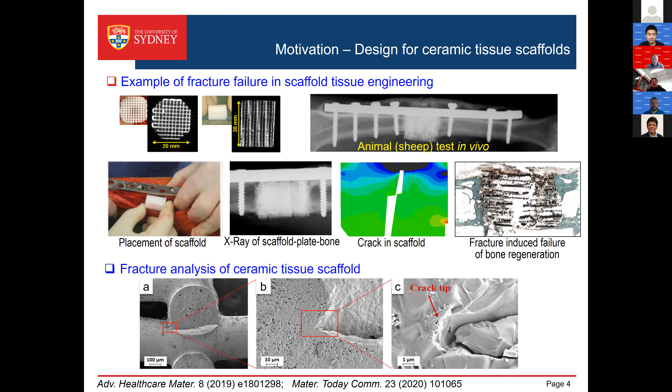So this actually gave us motivation. What's the best topological configuration so that we can ensure the system is safe? For this reason, we looked at the design problems. Showing here is a schematic. We have such a domain, and we try to place the reinforcement or inclusion materials in this domain so that we can maximize the fracture resistance.

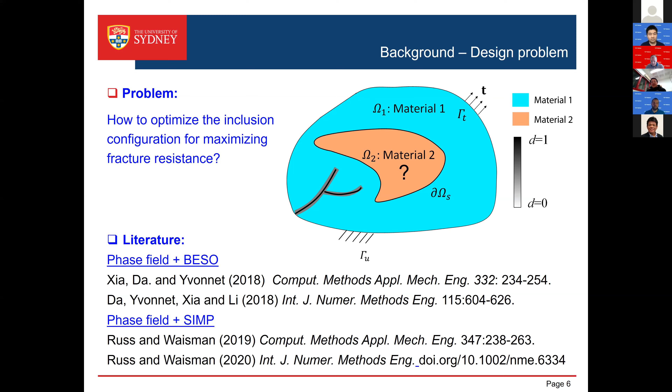I would like to acknowledge some existing work done by two groups. One is led by Xia and another is in Columbia. They used the phase field combined with BESO or phase field combined with SIMP model. In this particular study, we want to combine the phase field with level sets. So let's look at the phase field model.

Showing here is a different modeling mechanism to capture the fracture or crack propagation. As you can see, we can model the crack simply using this discontinuity, a boundary interface. Alternatively, we can still capture this change of the media, but this time using a smeared damaged crack. In other words, we can use a phase field variable to model this fracture inside of this media. To do so, we can define the phase field variable D.

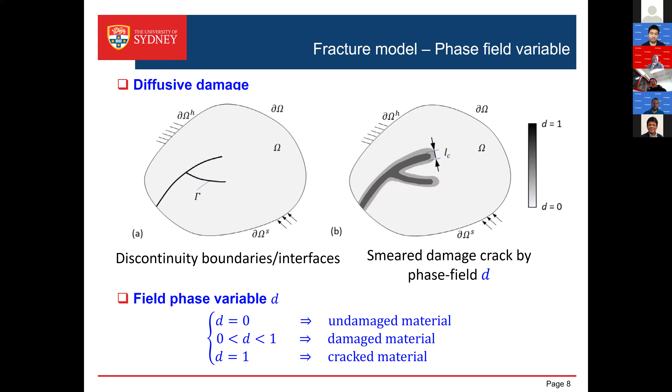If D is equal to 0, that means there's no damage. If D is equal to 1, it's completely damaged. In between, there's some damage, but it may not be completely fractured yet. So we can use the phase field model to model the whole system. The potential energy this time needs to take into account the fracture energy and the strain energy. These two components form the potential energy.

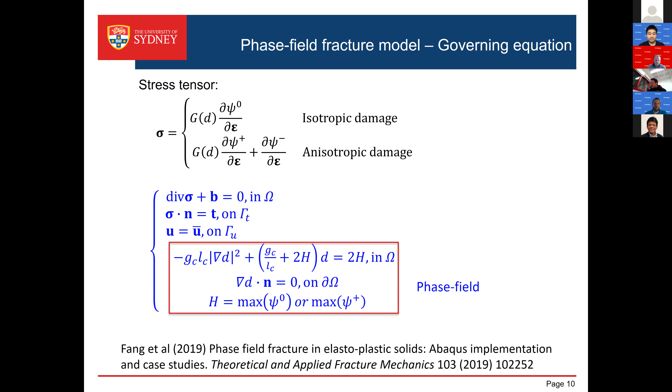Specifically, we can model isotropic damage and anisotropic damage by using the phase field variable. Showing here are the modeling details. We can formulate the stress tensor and then bring this to the equilibrium equation. So this is a new system using the phase field model. If you are interested in how to implement phase field, you can read this article. We implemented this in Abaqus and provided the code, so you can download the code and do some case studies to model the fracture using the phase field model.

Now, after we have this phase field method, we can further look at how to implement this phase field fracture model in topology optimization. Shown here is our problem. We're going to look at this domain, and there is a phase field based fracture. This is just a continuous model.

And our question is how to optimize the inclusion reinforcement materials so that we can maximize the fracture resistance. To do so, we use the level set formulation, and this is quite standard. We just follow the standard approach and use the level set function to model these materials and their evolution.

The objective function we set up for this optimization problem is to maximize the fracture resistance. For this reason, we can use the mechanical work as the objective function. The mechanical work can be approximately expressed in terms of the entire fracture or crack propagation process. During the whole fracture propagation process, what's the mechanical work? We can add all these together to approximately obtain this mechanical work.

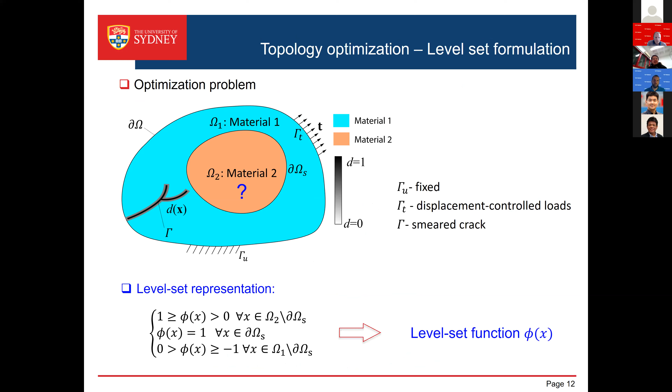Let me go back to this. Shown here, we use displacement-controlled loading. For this reason, we can look at the displacement loads. We apply displacement at a constant rate. Shown here is the formulation. After that, we can further write the mechanical work in terms of step-by-step incremental mechanical work.

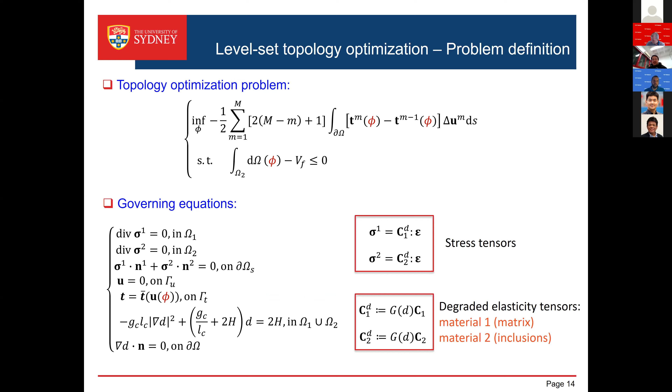Now, we can define the topology optimization problem by using the mechanical work. Our purpose is to maximize this, or minimize the negative. And we can set up the volume constraints. Shown here is the governing equation based upon the phase field. And we use two different materials. Material one serves as the matrix. Material two serves as the inclusion.

The challenge is how to derive the topological derivative. What we do is look at the influence of creating an infinitely small hole in this domain on the shape functional. This is a typical formulation for sensitivity analysis. But the challenge is that, first, this is a nonlinear problem. We need to take into account the progressive crack propagation.

For this reason, we need to linearize this nonlinear problem by using very small or short time steps. Then we can derive the sub-derivatives in a stepwise fashion, and the total derivative is just the sum of all these sub-derivatives. We make use of the staggered algorithm for each time step. In this particular case, we ignored the effect of topological change on the phase field because of the small time step.

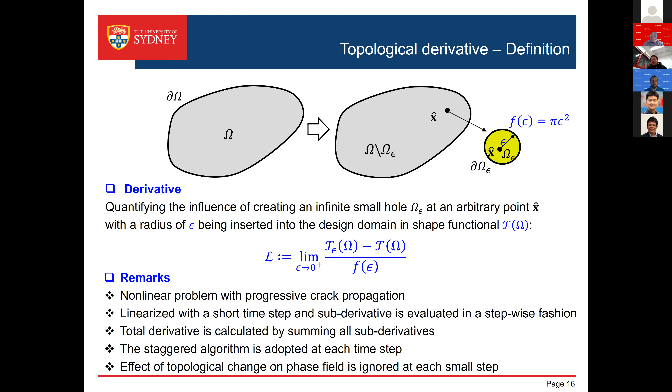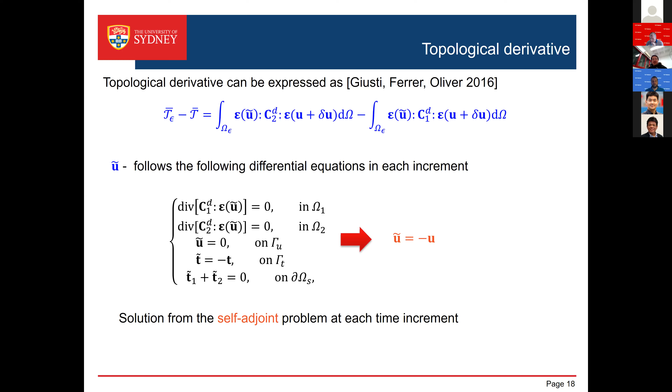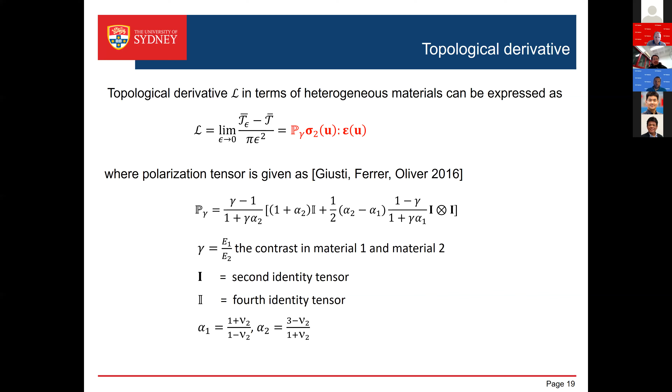And that gives us a really important clue. This actually comes with the same shape as the previous governing equation. For this reason, when we solve the previous governing equation, we can obtain the self-adjoint variable. So this is step-by-step time dependence. And we can further write the topological derivative in terms of the heterogeneous materials. Shown here is some more specific mathematics.

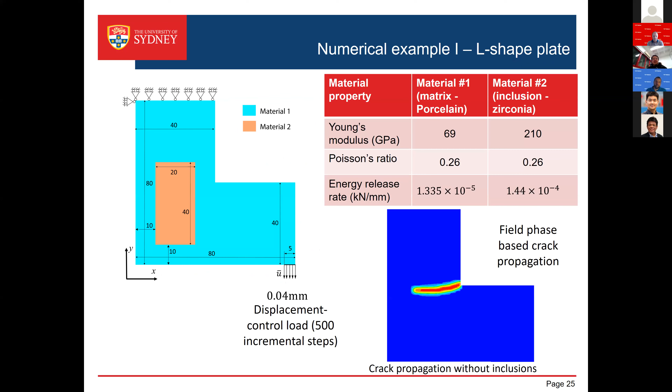The first example we would like to look at is an L shape. Without the reinforcement inclusion, we can see the crack propagates horizontally, as shown over here. After we place the inclusion or reinforcement, we can see the fracture changes direction.

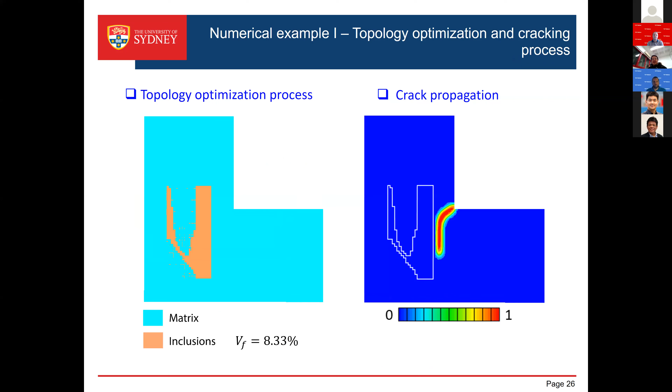So showing here is our topological design process. This is the corresponding fracture process. And some people may argue if you want to block crack propagation horizontally, you can easily set up two vertical bars, and they can prevent this propagation horizontally, or just simply place a square inclusion, or you can simply use the stiffness-based linear topology optimization.

In comparison, if you look at the mechanical work, we can see clearly the proposed method, the phase field-based topology optimization, provides the highest mechanical work to actually fracture the structure. So this is a comparison. If you plot the mechanical force versus the displacement, we can see the proposed method actually generated the largest. Below this is the energy, so it generated the highest mechanical work.

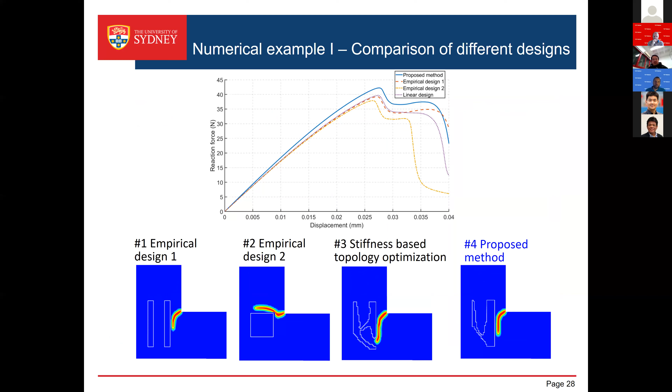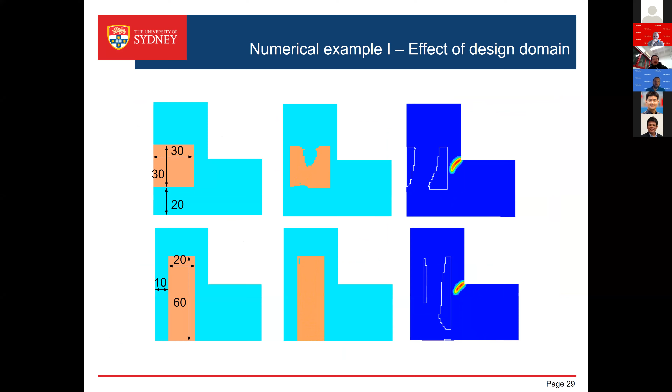So some people may argue if I place the design domain in different places, the results can be different, as you can see from here, but it comes with the same volume. So basically this is our design domain inside of this L shape. The second example I would like to show is, if we have this slab with two preset cracks, how to optimize the inclusion topology.

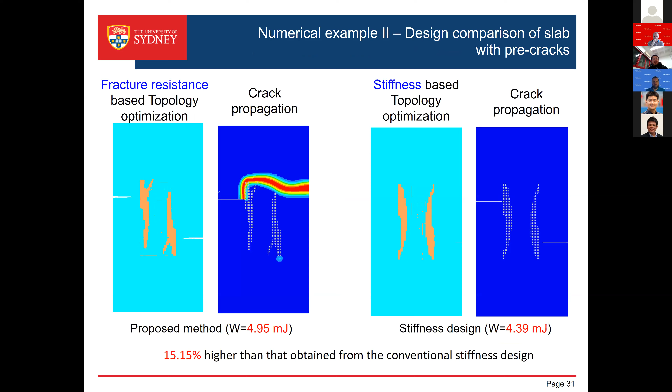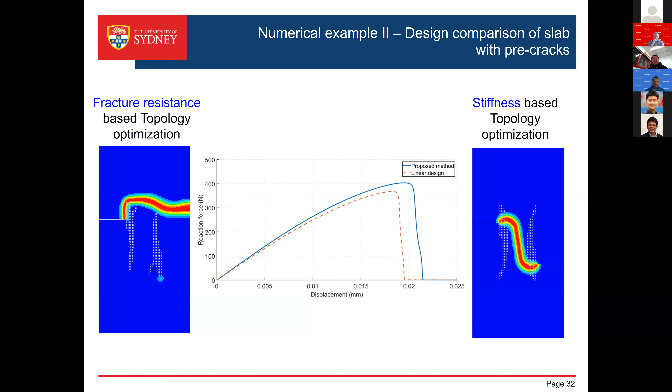So the left-hand side is fracture resistance-based topology optimization, and the right-hand side is a stiffness-based design. This is more traditional, and showing here is our fracture process inside of the optimized inclusion. And this is a comparison. If you plot the force versus displacement, obviously this one comes with much higher energy to fracture the structure.

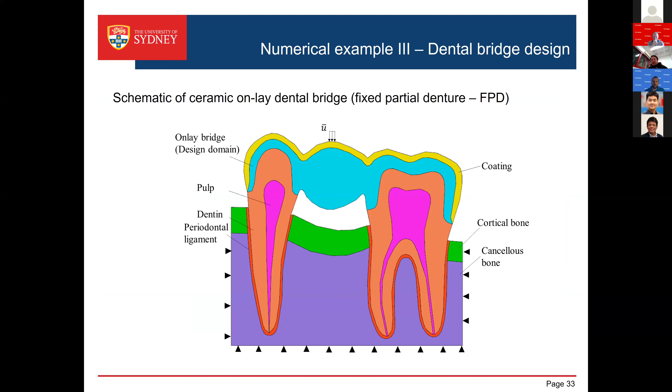All right, to conclude, first of all, we present the phase field-based level set topology optimization for enhancing the fracture resistance. And in this particular study, we use the path-dependent topological derivative. So this is quite important. And finally, the proposed examples actually show the advantage of this type of study. If you want to know more detail about this study, you can refer to this particular paper we recently published.

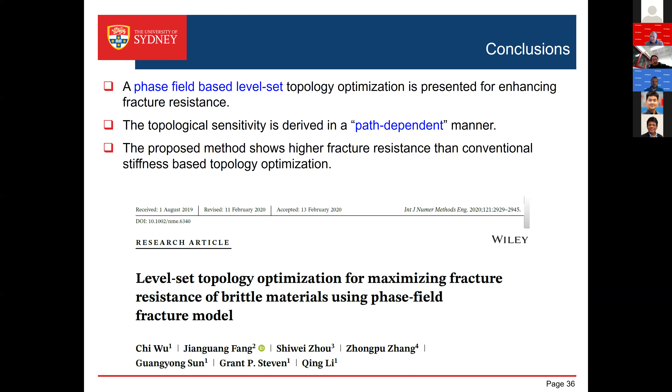So I have a question. Yes, please. Okay. Can you hear me, Professor Li? Yes, I can hear. Okay. I think this is a very wonderful work, and the presentation is also very clear and insightful.

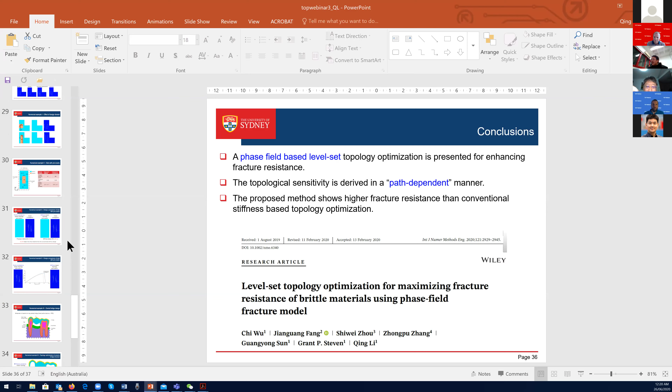So my question is that, to my knowledge, the measure of the fracture resistance is closely related to the boundary condition, right? Yeah. So my question is, in your research work, what kind of boundary condition? I mean, do you prescribe the external load, or prescribe the displacement on the boundary, or are both types of boundary condition considered?

In this particular study, we use displacement-controlled loading. We can of course use force loading directly. The displacement loading is relatively more stable for this kind of modeling. So for this reason, currently we just use the displacement control. We can of course try later on directly applying the force on the boundary and see what's the difference, in particular for the topology optimization results.

Okay. So I mean, if you change the type of the prescribed boundary condition, maybe the sign of the objective function should be changed. For example, from minimization to maximization, something like that. Yeah, that can be, you're right. So, I agree. So thank you very much.

Thank you. So Qing, I have also a question. Can you hear me? I can hear. Yeah. So I heard that you are using the displacement loading conditions, right? So in that case, the adjoint equation should not be the same as the equilibrium equation when deriving the sensitivity. So in one of your slides, it is written that the adjoint variable is equal to the negative real displacement.

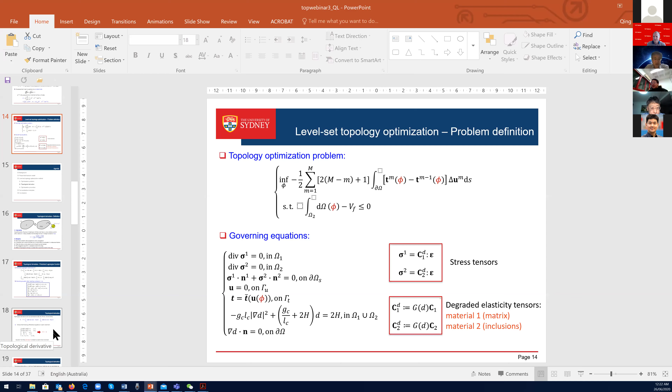You said you are using a displacement loading. Yeah. So here, if you look, the traction loading, right? If you look at this comparison with that one, they have come with a similar sort of formulation. So that means that we can actually use the sort of self-adjoint solutions to obtain that. For this formulation, the adjoint equation is the same as the state equation. That's right. Thank you.

Thank you. I think Wei Chen has a question. Yes, Qing, this is a very nice work. Can you hear me? I think it's very practically useful.

I have a question about modeling the fracture behavior, because fracture behavior is very much like a microstructure-induced behavior. So there's a lot of stochasticity in the process, and it is very much location dependent. I don't think this is something that needs to be done for this particular work right now, but I'm asking for the long run: how would you introduce stochasticity, and how do you introduce microstructure-induced behavior in this kind of process?

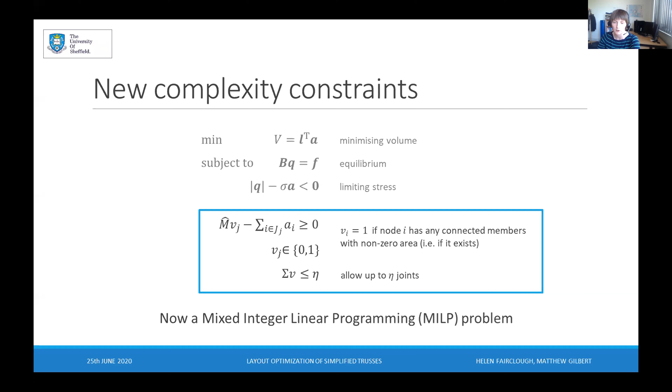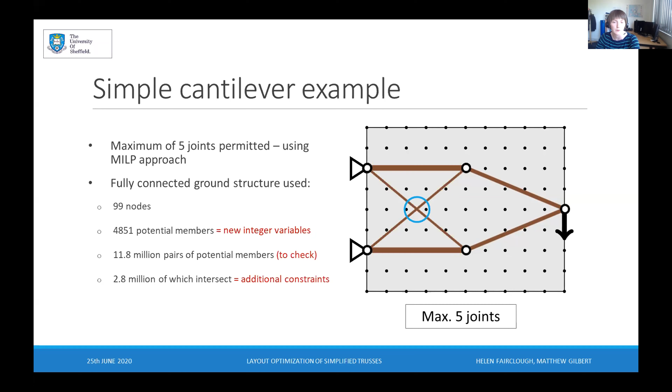And from this, we would find that almost 3 million of them would have to be an additional constraint to stop them from intersecting. So here we have those new constraints added to the formulation. And you can see this is now a very large integer programming problem, really far beyond what's tractable. However, we can still solve this if we use what is known as lazy constraints. And we use this to implement these bottom constraints here.

So with a lazy constraint, we don't include it in the original formulation as we send it to the optimizer. Instead, every time a potential solution is found, we check to see whether any of them would be violated, and if so, we add only those constraints to the problem. So this is now much smaller, and we can try and solve it.

So for this example again, if we find this solution as the potential bound, we do the check, we find that these 2 bars are intersecting. So we know that we need to add a new constraint referencing those 2 bars, saying they can't both be present in any given structure. We reject it as a potential bound, and we continue using our branch and bound algorithm. We continue this until we find this final solution for this case.

And to find this, we actually only needed to add 3 constraints to prevent 3 crossovers compared to the several million that we'd have had to add if we wanted to add them all at the beginning. So in this, we've reduced the computational time from a problem that wouldn't converge even given days of computing time to something that solves in about a minute. And again, we can refine it somewhat by using geometry optimization.

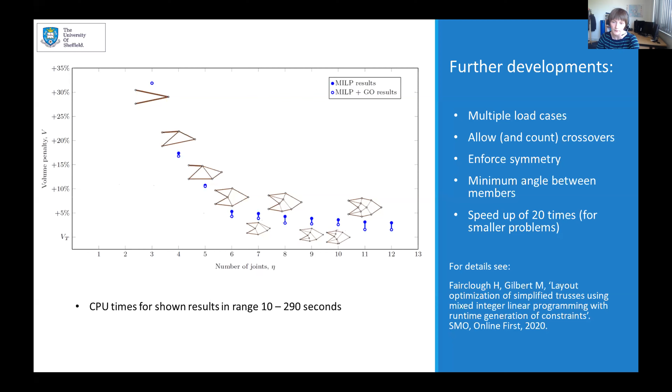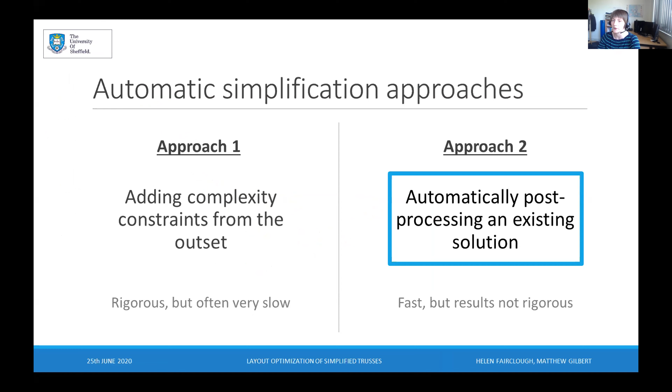However, even though we have these significant speed ups, we're still looking at about a minute to solve these problems, which isn't quite quick enough if we want to make an interactive tool for designers. So I'm now going to outline our second approach, which is a faster but less rigorous approach, and it's based on a post-processing type approach.

So for this one, we'd solve the layout and geometry optimization problems in the standard way. And our next step would be a modified version of the geometry optimization, where the objective function is now to minimize the number of members, and an extra constraint is that we have a limit on the increase in volume. And instead of using integer variables, we're going to approximate those variables using a smooth Heaviside function, so we can use a general continuous optimizer there.

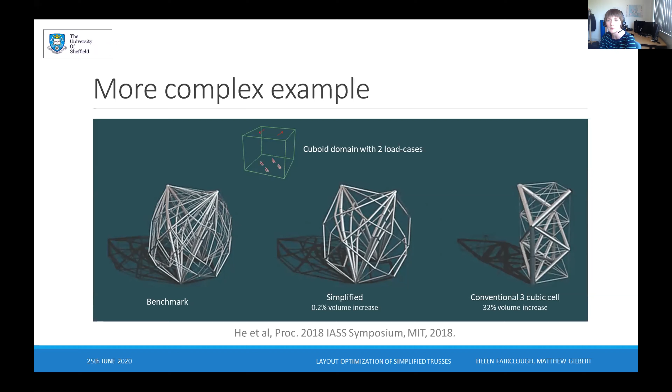So this approach is the one that we've been using in most of our software that we have available. So we have a plugin for the Rhino and Grasshopper parametric modeling software that is quite commonly used in the building industry. And this lets you create quite complex 3D geometries, and you can interact with them parametrically.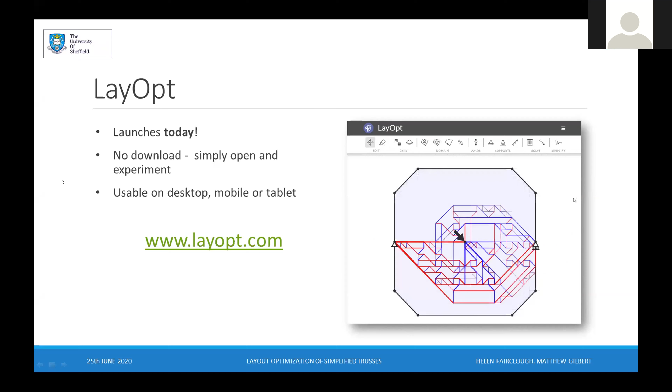Sorry, can you hear me fine? Yes. Go ahead. Sorry, it's Dirk speaking. Can you just go back to the slide where you illustrate the original problem you had? You had a slide with a very messy truss structure. That one? No, earlier on. Here. Here, yeah. Okay. I wonder whether there might not be slightly more elegant ways to solve the issue you're trying to solve, rather than adding all sorts of... Sorry, somebody is making a lot of noise, mute microphones if you are not speaking. Could you repeat the question? No, it's not really a question. I just wanted to see the picture again.

I just wonder, maybe to put it to the floor, whether this is the sort of result we expect from a truss optimization. How much is that result just maybe a failure of the optimization algorithm, or in how the problem has been set up? So the top right image there is very much a Michell-type truss-like continuum, or a close approximation thereof. So we know that there are significant numbers of problems where that is the theoretical solution. Indeed, there are clearly many options for how we simplify things. Okay, okay.

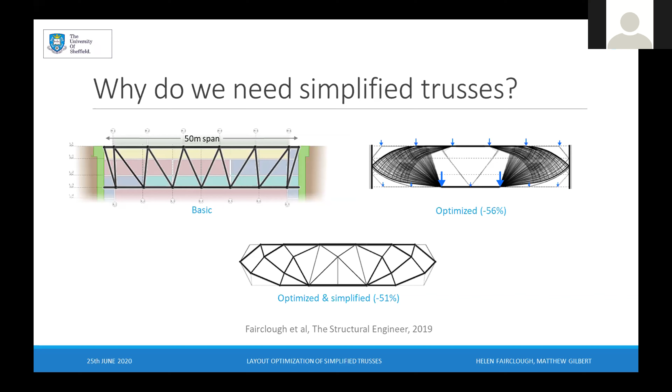And then a quick question on connecting members, which is, I think, on the next, you had a couple of nice basic simple pictures. Here, also this, whether the members cross or not, you know, if it's really an optimal solution and the members cross, but they should not be connected, then that's sort of what it should be, or no. You know what I mean?

Yeah, so we have in the paper also extended this so that you have a limited number of members, but that number of members includes sort of one extra for every time you have a cross. And yeah, we found that particularly useful in multiple load case problems where we use a plastic approach. So you get these sort of overlaid examples where you have almost two structures, one on top of the other. So we found that it was really helpful to be able to take that approach then.

Yeah, and to be specific, my feeling is just that this issue of complexity and the number of connections you have at a node can also be cast as linear constraints in some way. I just have a feeling, but I might be wrong. I think it might be possible, but yeah, maybe something to think about, or maybe someone gets inspired at some point. Yep, I'd certainly be interested to see it if anyone can find a way to do it.

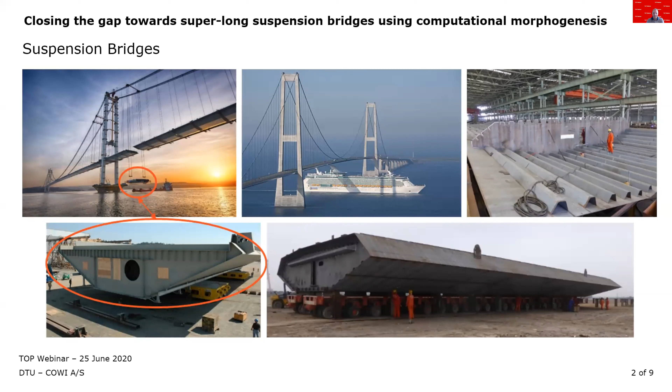And these are some of the largest man-made structures, and they facilitate very important infrastructure links and have often become landmarks. The part of the bridge that we have focused on is the bridge deck or the bridge girder, which is the part of the bridge that carries the traffic, and as you see, is suspended here from the hangers. The design principles of the bridge deck have remained more or less unchanged for the past 60 years. So we thought it was about time to see if we could reinvent this design concept and make a more material efficient design concept.

So further motivation for doing the work is that in suspension bridges, girder self-weight is critical, particularly in super long suspension bridges. And this is clear from this small figure, where you see a typical layout of a suspension bridge. We have the bridge girder carrying the traffic. So the self-weight of the girder and the traffic load has to be carried by hangers and main cables, which transfer the loads out to the anchor blocks, towers, and tower foundations. So this means that if we can reduce the material consumption and the weight of the bridge girder, then we can also reduce the material consumption in the remaining part of the bridge. Furthermore, a more lightweight bridge girder will also allow even longer main spans to be constructed.

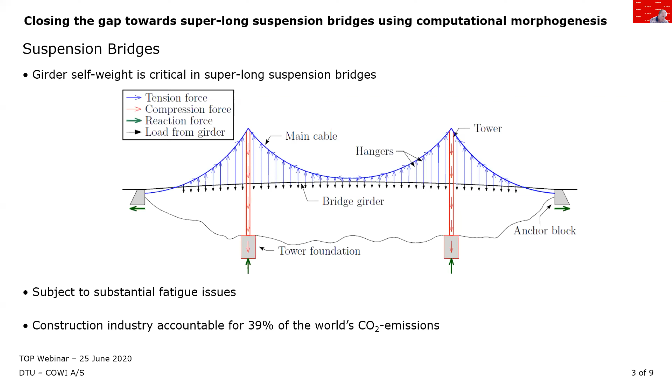Furthermore, the conventional design concept of these bridge girders is subject to substantial fatigue issues, which is quite a large challenge. So this motivates identifying more efficient structures. And finally, the construction industry is accountable for 39% of the world's CO2 emissions, which really advocates for more efficient use of materials within the construction industry.

So the starting point for our work was the Osman Gazi Bridge, opened to traffic in 2016 in Turkey. At that time, this was a state-of-the-art bridge design. So we thought this was a good starting point for our work.

And as you see from the figure to the lower right, this is the conventional design concept. So we have outer skin plates stiffened by troughs in the longitudinal direction and diaphragms spaced 4 to 5 meters apart, stiffening in the transverse direction and transferring loads out to the hangers.

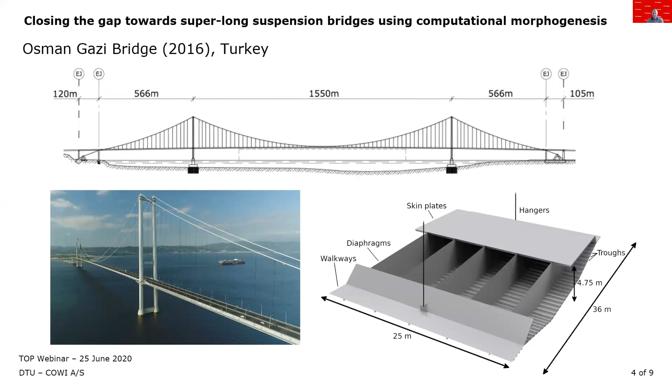The model we use for the optimization consists of 3 sections of this continuous and periodic bridge girder. So this is a quite large domain. So to discretize this into small elements, we needed 2.1 billion elements to have an acceptable discretization.

So we made an assumption about having a fixed solid top plate for the traffic to go on top. The outer geometry is similar to the conventional design, so we focused our work on distributing material within the interior of this domain. Furthermore, we fixed the 2 end surfaces. One end we applied fixed boundary conditions, and at the other end we applied global section forces.

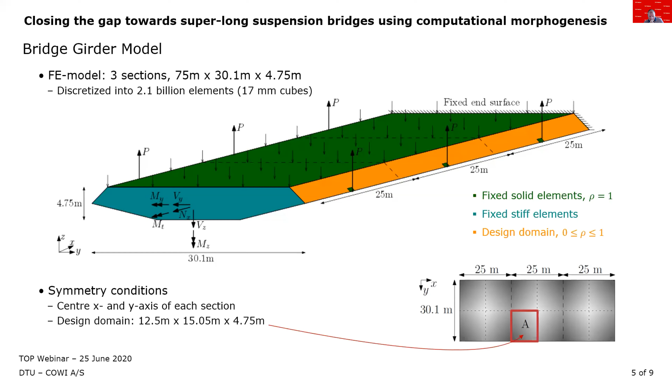And this is also part of the reason why we have 3 sections of this periodic bridge girder, to impose boundary conditions and these global loads. Furthermore, we imposed a symmetry condition both along the longitudinal center axis and along the transverse axis of each section, which is similar to the conventional design because you have the same loading in both sides of the bridge girder.

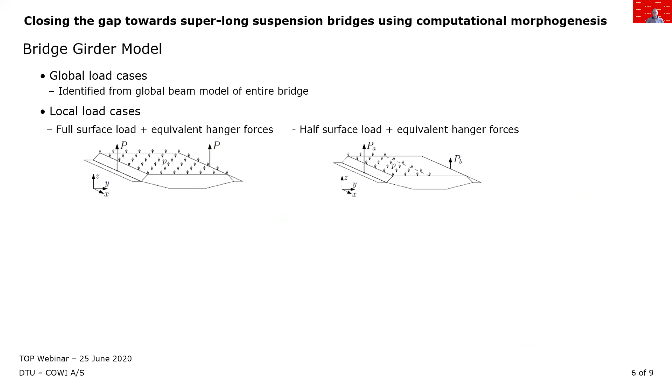The loads we applied were both global load cases from a global beam model of the entire bridge and 2 local load cases to take account of more local effects. The optimization problem is the classic compliance minimization problem. So we wanted to maximize the stiffness in the center span for a given amount of material.

And then we have the usual state equations as constraints, as well as the volume constraint and the box constraints on the design variables. The solver we used was the method of moving asymptotes. We used the density filter, and then we solved the optimization problem for 400 iterations over 85 hours on 16,000 CPUs.

So the results we got from this optimization, you see here we have 3 sections of the bridge. First of all, we see that we actually have some transverse diaphragm-looking panels. However, they are curved towards the hangers, so they transfer the loads more directly towards the hangers and then on into the rest of the bridge structure.

We also see that these panels are spaced much more frequently, which means that we can have a thinner top plate, so we don't need this top plate stiffened by longitudinal troughs. And if you take a closer look at the region around the hangers, we also see this longitudinal panel-like structure to support this high force region.

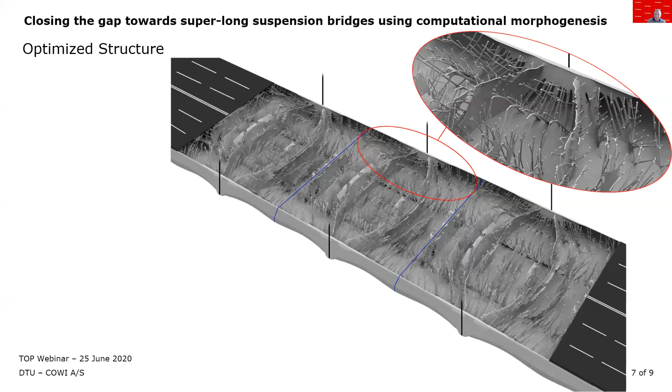However, this structure is quite complex, and it would be, at this scale, impossible to construct with conventional manufacturing methods. So we wanted to take a further step, which was to use this structure as inspiration for an interpretation of the design. So we came up with this design indicated with red panels, which is a design with a similar complexity to the conventional, but inspired by these gigascale topology optimization results.

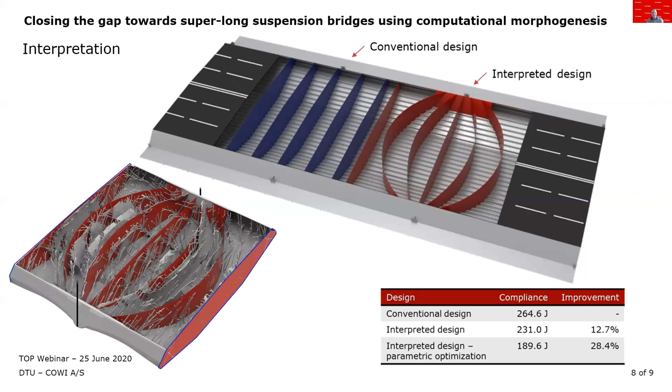So compared to the conventional design you see here to the left, which is indicated by the blue panels, we have our interpretation with the red panels, with these curved panels towards the hangers. And by applying similar plate thicknesses as in the conventional design to our interpretation, we gained an improvement in stiffness or in weight of around 13%.

Then subsequently, we did a parametric optimization to redistribute the material within our interpretation. And here we gained an improvement of up to around 28%, or an equivalent weight saving of around 28%. So the conclusions from our study and in the paper are that we gained these possible weight savings in the range of 13 to 28%.

And this is equivalent to a weight reduction or a CO2 reduction of the entire bridge in the range of 9 to 19%. And the layout we came up with by inspiration from the topology optimized design was a layout with a slight increase in number of diaphragms. Some of the diaphragms were curved towards the hanger anchorage. And then we have this additional longitudinal support panel, which is not present in the conventional design.

I think this work really demonstrates how topology optimization could and should be used in civil engineering. So we use the very complex results for inspiration and do interpretation towards more simple designs. So this approach is really beneficial in the early design stage. So I hope you found this interesting, and the recently published paper is available open access.

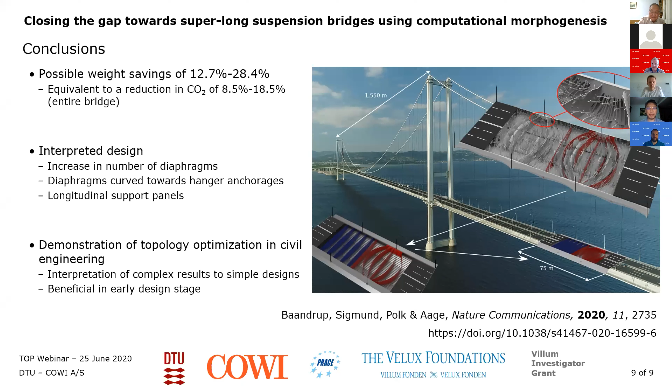I think I'll leave Mads to build bridges. I had two courses about it 15 years ago. So he's much more of an expert on that than I.

I'm Josephine Carstensen. I'm an assistant professor at MIT. And I'm excited to tell you about our recent work on topology optimization with nozzle size restriction for material extrusion-type additive manufacturing. And there went half my time just saying the title of the talk.

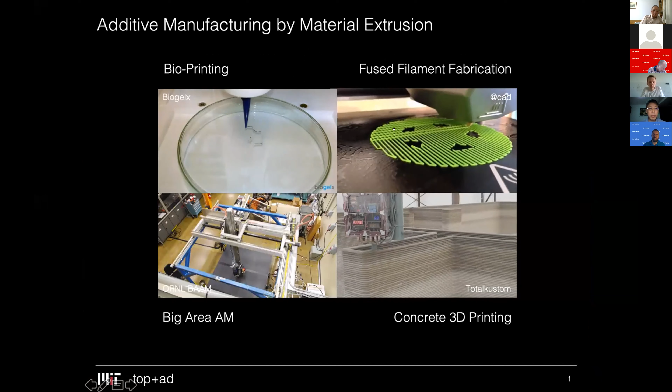So material extrusion is used in a range of additive manufacturing techniques, ranging in scale and material systems from bioprinting or bioextrusion, over fused filament fabrication or fused deposition modeling, to bigger scale construction techniques such as big area additive manufacturing and concrete 3D printing. And because of this wide range of applications, we are of course not the first ones to be interested in coupling topology optimization and material extrusion. Quite a bit of work has been done for FDM, and a little bit touching on designing for concrete 3D printing.

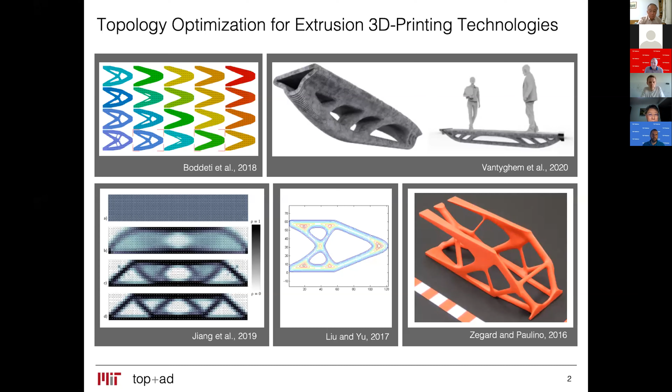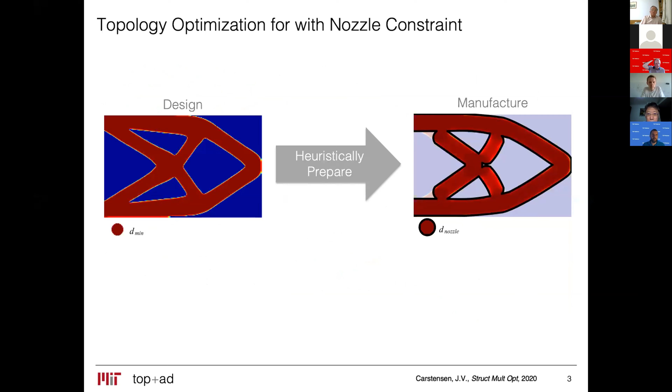But none of these works have incorporated the fact that all of these processes usually have just a single nozzle that moves throughout the design domain in a layer-by-layer fabrication method, and the fact that this nozzle cannot change size as it goes along. So what you currently have to do, if you get even a quite simple design, is take your design and prepare it in order to be ready for manufacture. And what we really want to do, as everyone else here, is move away from that and try to create designs that are ready for printing.

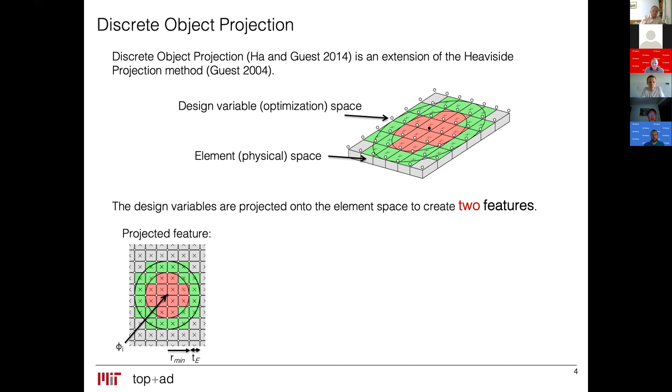We have done that in a density-based topology optimization framework, based on the idea of modifying discrete object projection. Discrete object projection is really an extension of the Heaviside projection method, where you have a design variable space where you do all your math, and then a physical finite element space where you solve your physics. The way these two talk to each other in discrete object projection is that an active design variable creates two features in the physical space. In the original formulation, these two features were a circle and a concentric feature, and it was used to include, for instance, stiff inclusions in a compliant phase material.

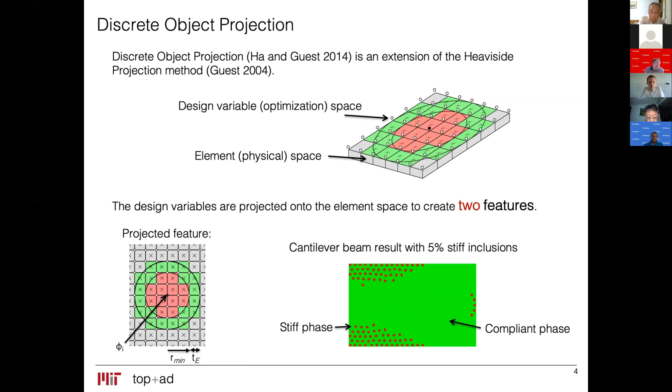We use this with the assumption that when a nozzle moves over the build plate and deposits material, it really does it by creating two regions: a core region where you cannot overlap nozzle passes, and then an overlapping thin region at the edges where you are allowed to create some sort of overlapping with an adjacent pass. And we're assuming that this is a material or fabrication specific region size that the manufacturer would either provide you or you'd be able to somehow estimate. So this is something the designer sets.

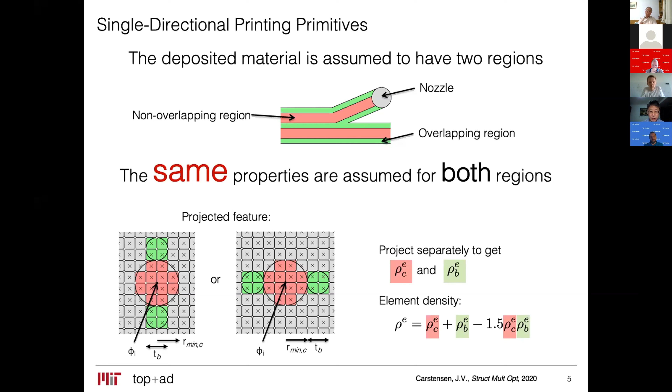In this work, we have assumed that these two regions have the same properties. So we have modified this discrete object that's projected so that it now has a circular feature, that's the center core region, and then it has these bonding regions exterior to it. Initially we said you can print going mainly in one direction. So the designer would choose: is my nozzle mainly moving horizontally, or mainly moving vertically across the build plate? You then project separately to get these pseudo densities, one for the core region, one for the bonding region, and then you combine them to get your final element density.

Just to quickly run through how this equation is constructed: if you are in an element that has one of the two features or pseudo spaces active, then you will get a fully solid stiff element. If you are in an element where you're overlapping, so you have active features from both the bonding and the core region, you'd be penalized on the element density. And if you are in a void region, then nothing is really different from what we're used to.

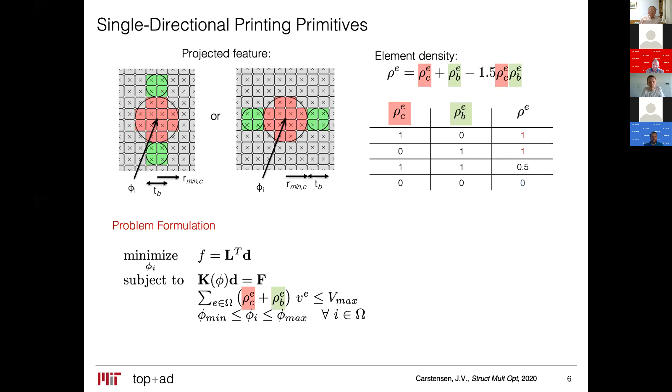We're not doing anything very fancy with the problem formulation. We're solving for either output displacement or compliance. We've changed slightly the volume constraint to take into account that we now have these two material phases that describe the entirety of the material that's placed. And we're using this in conjunction with SIMP to penalize the overlapping, and MMA is our gradient-based optimizer.

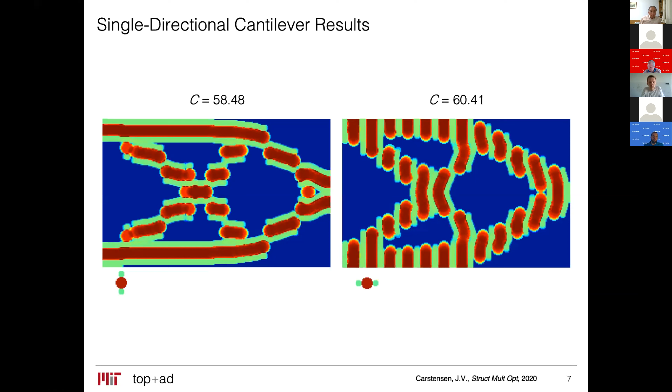Now, most printing processes are not forced to move only in a single direction. So we wanted to expand the movement of the nozzle, and we did that by introducing the placement space that we already had, and then also a directional space. So now if a placement variable says go, it creates a circular feature, and then depending on the magnitude within the directional space, it will rotate where the bonding region is.

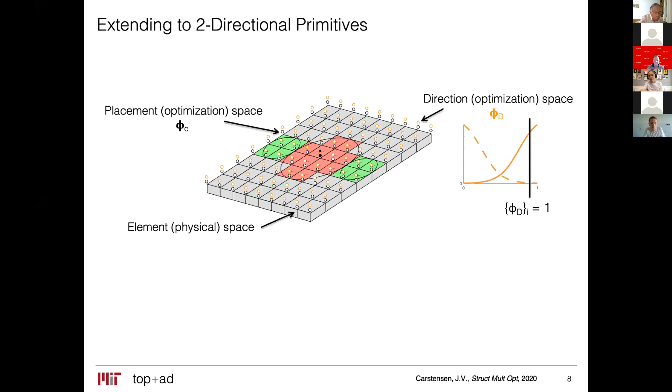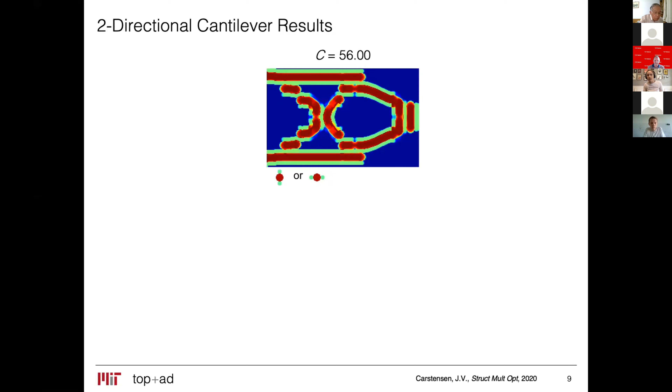So if we have a low magnitude, we'll get a horizontal feature, and if we have a high magnitude, we'll get a vertical feature. And now the density is constructed in a similar way. I won't go through it, but by these three separate projections. This is our result for the more free nozzle movement. And here we get something that looks like what we're more comfortable with.

I also have a couple of different examples where you can, of course, choose the size of your nozzle. You can choose how much is core, how much is bonding region, but in the interest of time that's running out on me, I'll be a bit quick and just show it as a teaser for you to pick up the paper. And instead, I will say that we've developed a technique that includes a nozzle size restriction in density-based topology optimization.

It doesn't come for free, as nothing does in life. It increases the computational cost for the single directional designs by about 30%. For the two directional designs, where we've doubled the number of design variables, it's obviously quite significantly more. We're not there, it's not perfect. We're not ready to press print, and anisotropy and the continuity constraint, which are also very important for these extrusion-type processes, are not currently considered. So we know what to spend the rest of our summer doing.

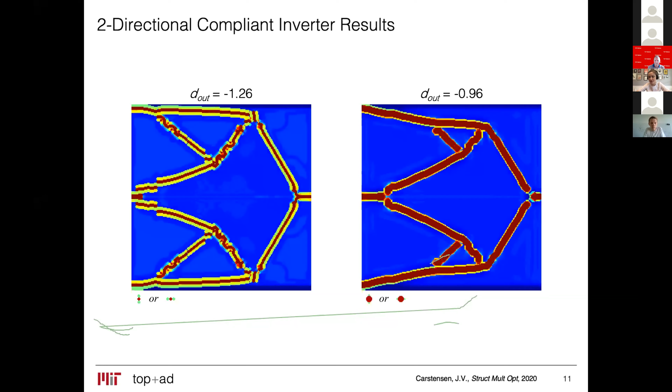But you go back to the MBB beam or whatever it was. Yeah, so here when you have a smaller nozzle size, you get also more members. Yes. So these examples here have kept the ratio of core to bonding region constant, and then just varied the size of the nozzle. And obviously, as you say, you get finer features if you use a finer nozzle. And the trade-off in complexity and compliance, I think most of us are familiar with. Yeah, okay, thanks.

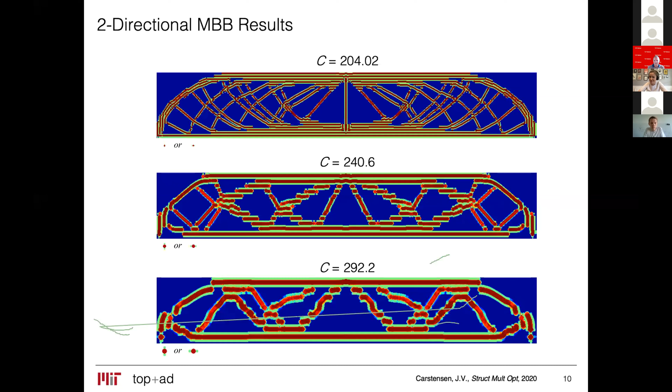Maybe I could ask a question. I didn't fully get whether you regularize the angles, or can they change as they want in every pixel or every point? So in the first bit, they can't. In the second bit, they can. Right now it's only set to change between two, but I think you could make an extension where you allow more free rotation.

So when you have a line going diagonally, then it's constantly switching from horizontal to vertical to horizontal to vertical? Because it's a circle, it can also make diagonal lines without overlapping up to a certain angle. But it's more difficult for it to switch completely. Okay. So you can make a build up that's not perfect with just two, but gets pretty close. Yes, thank you.

We have time for one more question. Jun? Yes, very nice talk. I have a question about the connection between the beams. In our experiments, when the beams become very small, and because the tool paths are not continuous, the connection is very weak. Do you have some thoughts on how to solve this problem, the continuity of tool paths?

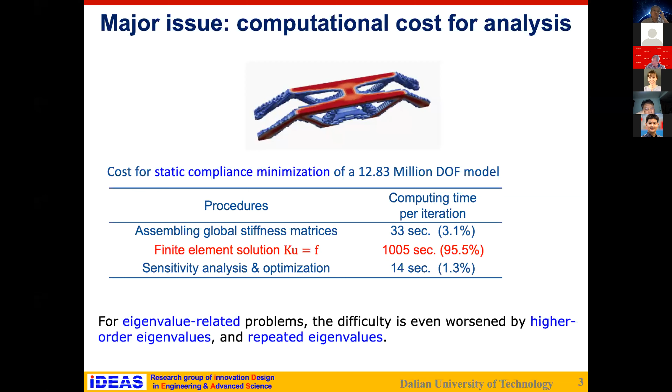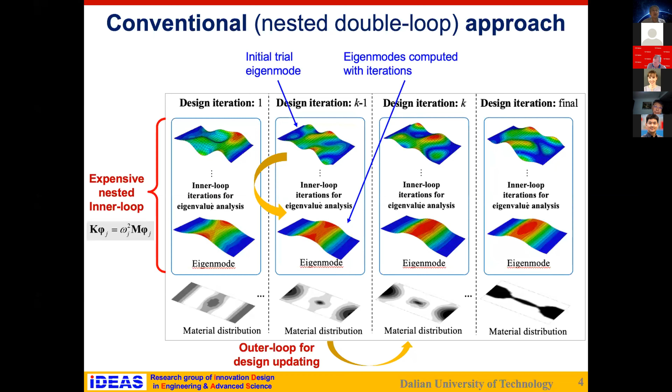So let's first take a look at the conventional approach, the nested double loop approach. An eigenvalue design problem is essentially a nested double loop minimization problem. The inner loop is eigenvalue analysis. One usually starts from a set of initial trial eigenvectors and then obtains the exact eigenmodes using some kind of iteration algorithm. This process is very expensive, but it provides the search directions of the outer loop design optimization problem.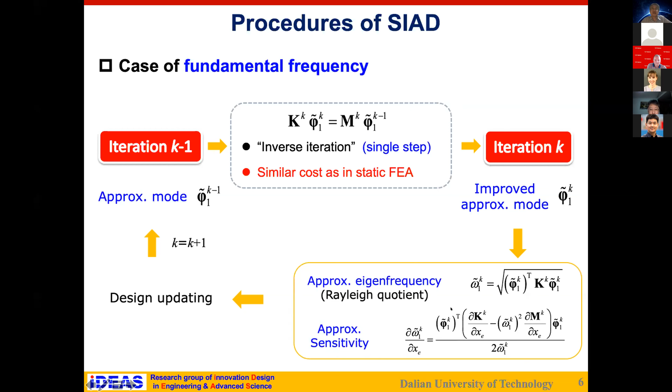For the simplest case of fundamental frequency, in each design iteration, we solve the linear equation here only once in order to improve the eigenvectors. This equation is very similar to the inverse iteration, except that here the mass matrix and the stiffness matrix are not constant anymore because the structure design has evolved, has been changed. Then we can approximate the eigenvalue with Rayleigh quotients and also its derivatives. So this is the basic idea.

In our paper, we have also provided a discussion on the convergence issue of this method. I'm not going into details, but I only show the result. We have proven that the convergence of the method can be ensured as long as the design change in each iteration is small enough.

For the case of higher order frequencies, we developed a subspace iteration-like procedure. Given a set of approximate eigenvectors, we first solve a linear equation shown here just once, and then solve a low-dimensional eigenvalue problem, and then we update the eigenmodes. For repeated eigenvalues, we have to solve another sub-problem of eigenvalue analysis in order to find the Gateaux differentiable eigenmodes.

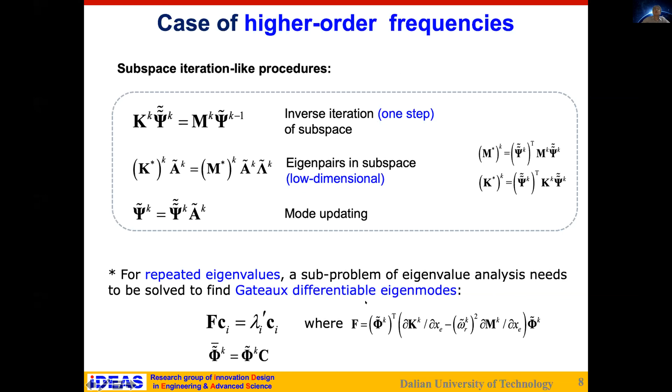Now some examples. The first example is to maximize the fundamental frequency of a beam with 2.4 million DOFs. We can see here that the method achieves a very steady convergence. For 100 iterations, we only need to solve 100 linear equations. However, for the conventional double loop method, you have to solve over 1,000 full-scale equations. On a desktop workstation, the double loop method costs nearly 70 hours, but our method costs only 10% of that computing time. And both methods finally converge to nearly the same optimized designs and objective function values.

In this slide, we also tested the method starting from a totally different set of initial eigenvectors. After only 10 iterations, our method produced very similar approximate eigenpairs and intermediate designs, and finally ended up with nearly identical designs. This is an example of a 3D structure with 6 million DOFs. You can see that the convergence is also satisfying here.

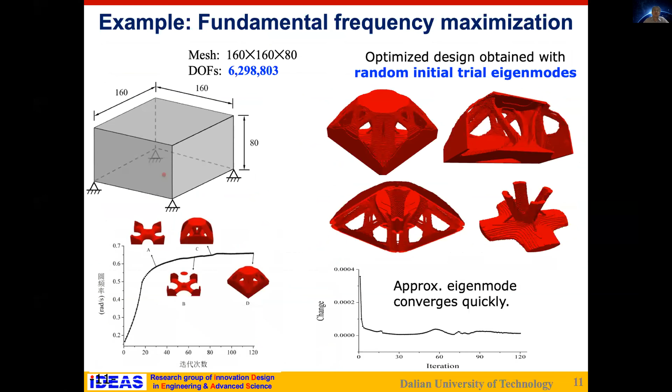And this example involves higher order frequencies. In the iteration history, we can see that there are 2 eigenvalues approaching each other and became repeated eigenvalues. However, since we use the differentiable eigenvectors, we could still find the correct design sensitivities here.

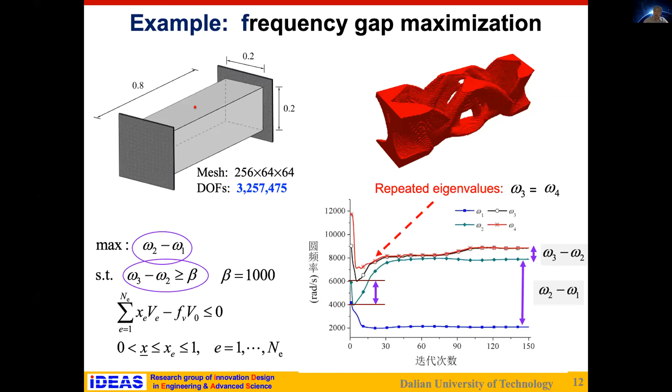And in our ongoing work, we have also developed a so-called multi-step relay strategy for SIAD. So here we use different levels of discretization of the model. We start from coarse mesh and then project the intermediate solutions of the eigenvalues, the eigenvectors, and also the structure designs onto the final mesh. So this also helps us to achieve better description quality of the structure boundaries.

So in this example, we maximize the second natural frequency using a 4 relay level of meshes. In the first level, we only use about 4,000 elements. And finally, in the final stage, we use 6 million DOFs. This design provides smoother boundaries in the optimized design.

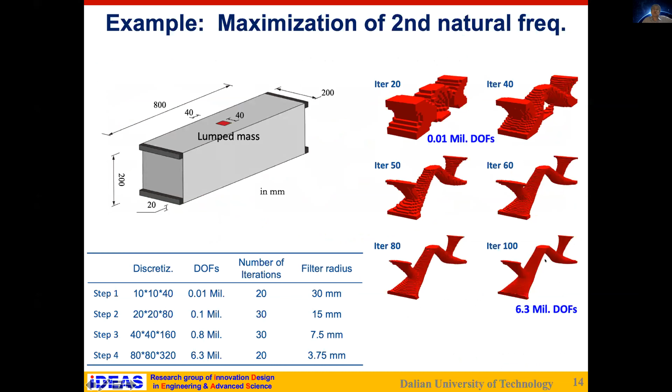Here we also see that this relay strategy is very efficient. Only the last 20 iterations are run on the finest mesh, and the first 3 levels of discretization cost much less time than the fine mesh computations, but they provide very stable design.

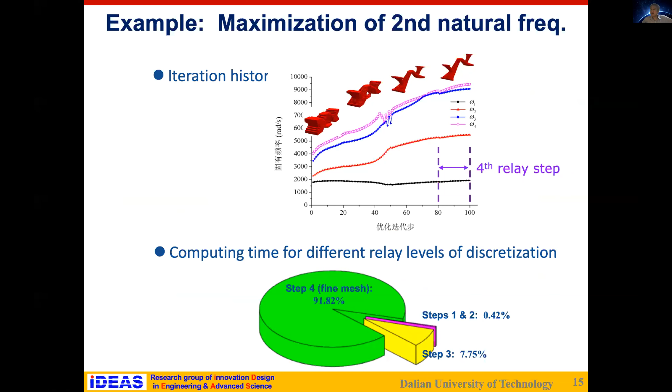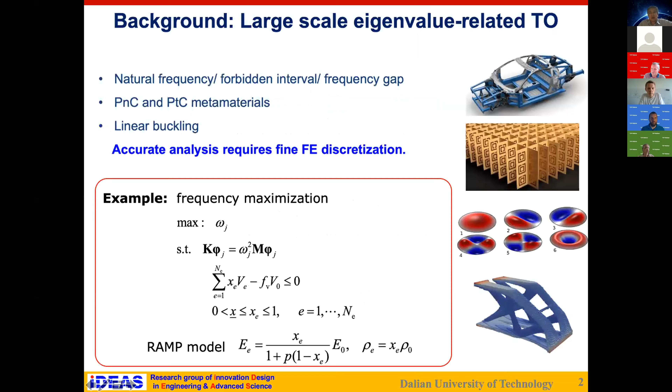I had a question also. So you're not solving the eigenvalue problem in each iteration, but how do you make sure that you actually solved it at the end so that you know you have an accurate eigenvalue estimate? So do you have some requirement that you cannot stop the optimization part before you have an accurate eigenvalue?

Okay. So in the final stage of the iteration, we can ensure that the eigenvectors we have achieved are accurate enough. So in the final stage, we can ensure that the Rayleigh quotient is very close to the real eigenvalue of the design. But in the intermediate design, we only use approximate eigenvectors and approximate Rayleigh quotient, and also approximate sensitivities to evolve the design.

However, we can prove that if the structure design is able to converge, then the eigenvalue analysis can achieve convergence in our method. So the details can be seen in our paper.

Okay, thank you. So Federico Ferrari, please, you have to unmute. Yes, hello. Hello.

Thanks for the presentation. And I have a question about this last point. So I can understand that you can prove that for a given design, you are using the eigenvalue, and so in principle, you can refine it and make it converge. My question is about how can you be sure that your design is converging? Because what I can understand is that you're using some sort of inexact Newton step, something like that.

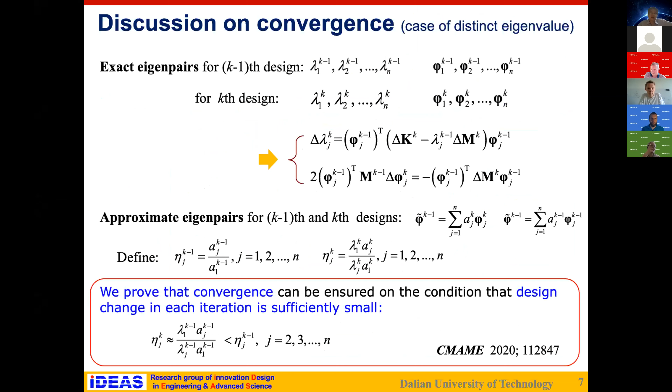So it is true that you don't need the precise gradients to converge, but you have to ensure that your gradients are good enough. So is there a check in your code to relate your residual of the eigenvector to the residual of your optimization? Because otherwise you might get lost at some point.

This slide shows the solution. We start from totally different eigenvectors. So these eigenvectors are actually selected ones. So here you can see that in the first iteration, this cosine-shaped eigenvector is very crude, and the calculated eigenvalue is far from the real one. But after about 10 iterations, the eigenvalue becomes very close.

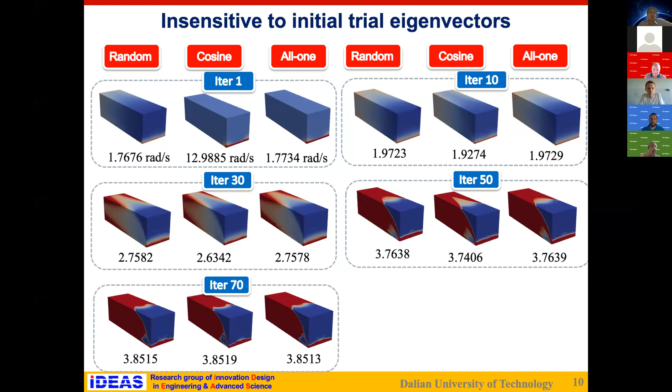This implies that the method has convergence property, and we cannot ensure the structure design using this method will definitely converge. But in almost all our numerical experience, they do converge to a very reasonable design. And here also, I'm going to show another slide.

So in the multi-step relay approach, we use a very coarse mesh, and after the iterations, the eigenvectors can be improved, and they gradually improve themselves along with the structure design. So here, I can only say that in most of the cases, the method is able to achieve convergence. And we have also checked the eigenvector errors. They do converge.

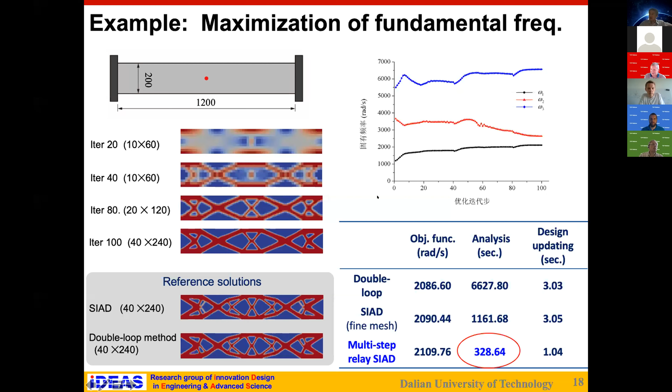Okay, thanks. Thank you very much. Especially thank you to the last speaker, Jianguang. I think now we can accept questions or remarks to all speakers here at the end. It could still be to Jianguang or to some of the others if you are burning with a question.

Yes, I'm sorry. I'm burning with a question on the last presentation. This I'm curious. You said the proof you have. How do you link the optimization problem to the physics or to the state equations? Do you use the stationary conditions of the optimization problem?

No. We use a kind of perturbation approach, and then we prove that the perturbation of the eigenvectors is linearly dependent on the design perturbations. So using this condition, we find that if the structure design converges, then the eigenvector results converge also. Okay, so it's a link with the sensitivities, yes. Yes.

May I follow up on the question, Ola? Sure, Fred. Have you tried the method also for cases where, as the optimization proceeds, many eigenvalues start to cluster? Yes. That's what I was talking about.